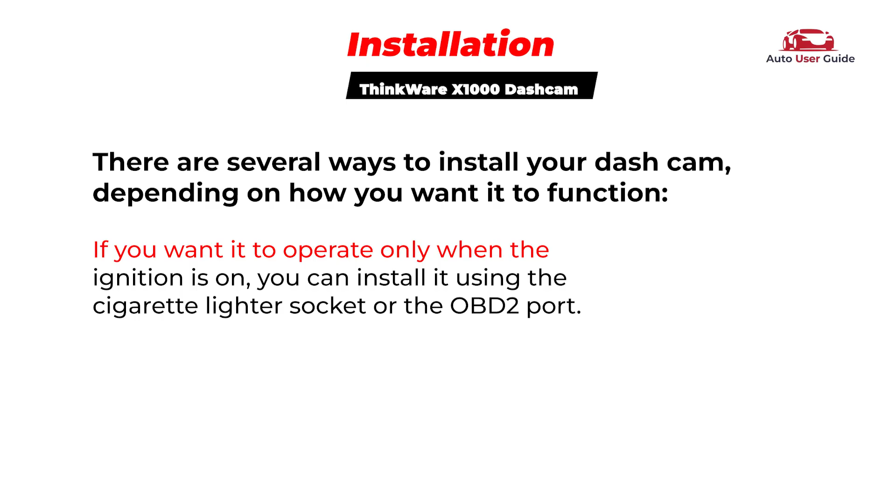Installation. There are several ways to install your dash cam, depending on how you want it to function. If you want it to operate only when the ignition is on, you can install it using the cigarette lighter socket or the OBD2 port. If you want it to stay powered 24/7, even when the car is off, a hardwire installation is required. In this video, we'll cover two installation methods: using the cigarette lighter socket and hardwiring it directly to your vehicle.

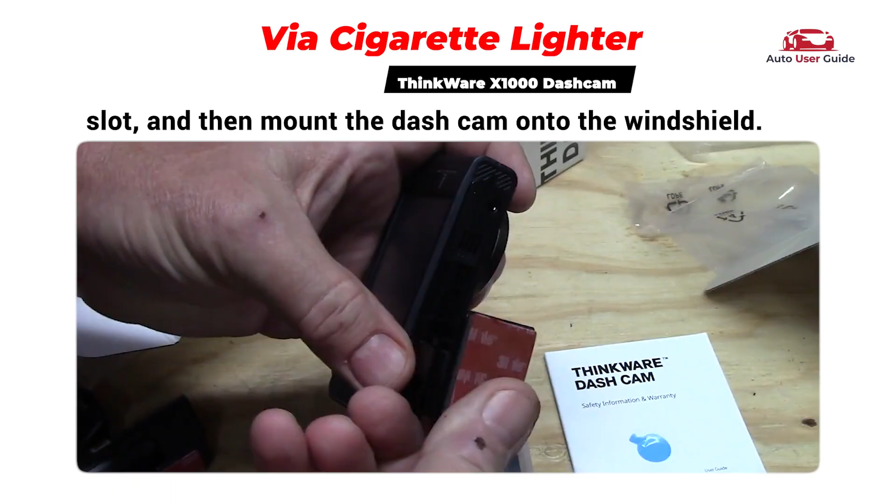Installation via cigarette lighter. Start by cleaning your windshield with a cloth, then choose a clear spot near the rearview mirror or in front of the passenger seat. Stick the electrostatic sticker at your chosen location. Next, insert the SD card into the SD card slot, and then mount the dash cam onto the windshield.

Connect the power cable to the dash cam and plug the other end into the cigarette lighter socket. Power it on to ensure it's working properly. Once confirmed, neatly tuck the cable into the vehicle's headliner and down along the A-pillar for a tidy setup.

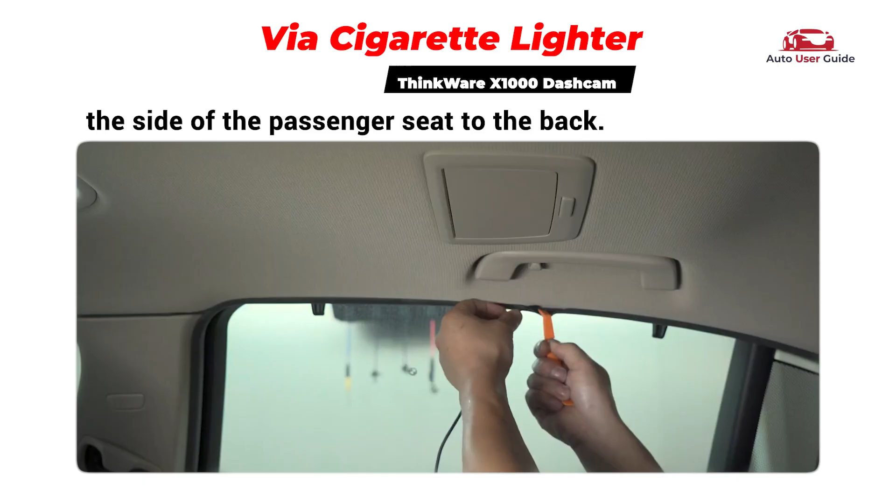Hide the charger wire along the front windshield and up the side of the passenger seat to the back. Connect the rear camera cable to the dash cam. Then repeat the process and mount the rear camera onto the rear windshield. Start the car and the dash cam will turn on by itself.

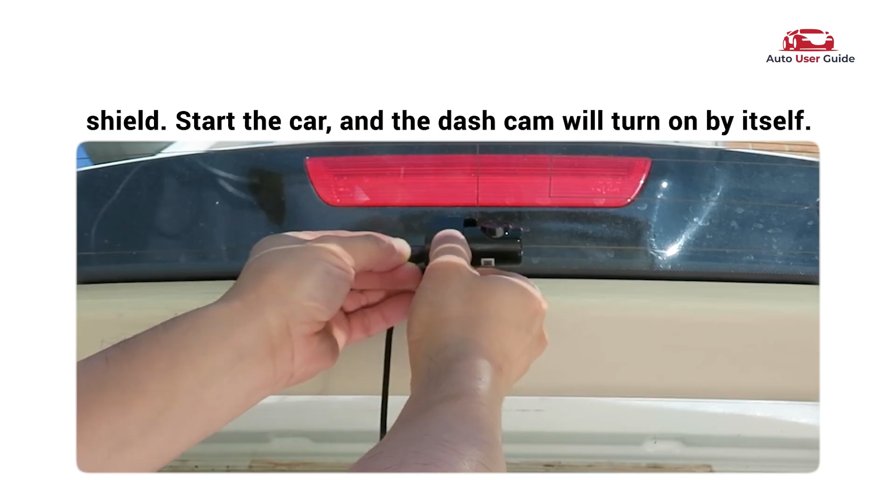Hardwiring the dash cam. Locate the cabin fuse box in your vehicle. Its exact position can be found in your owner's manual. For help, watch our fuse box guide video. Just tap the links below to view the video and access the manual.

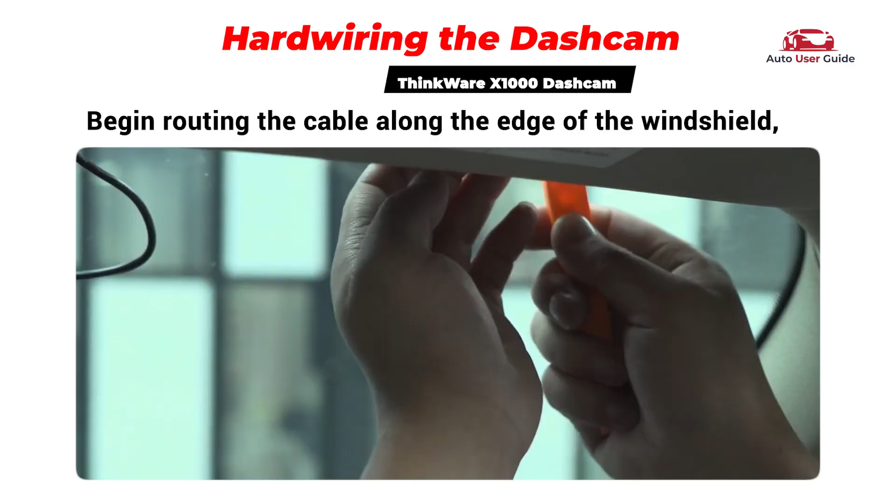Plug the hardwire kit into your dash cam. Begin routing the cable along the edge of the windshield, tucking it into the headliner to keep things neat and out of sight. Use a multimeter to check the fuses in your vehicle.

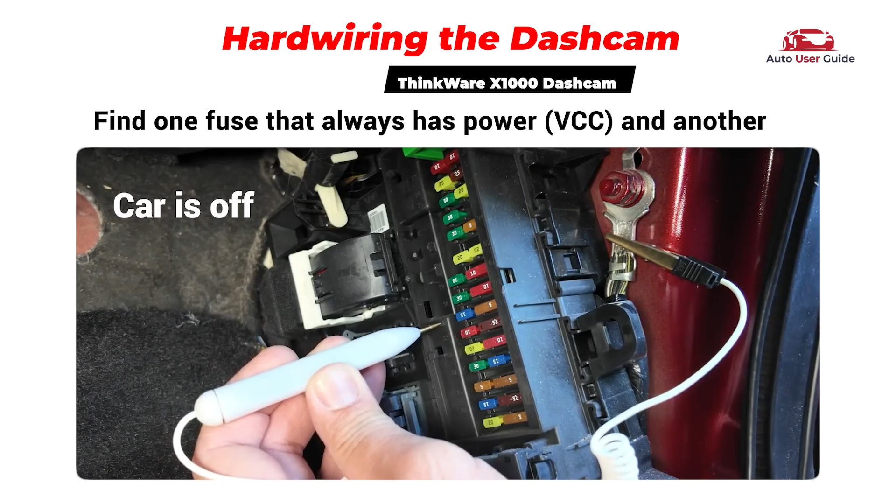Find one fuse that always has power, VCC, and another that only powers up when the car is running, ACC. The VCC fuse should show 12 volts at all times, while the ACC fuse should only show 12 volts when the engine is on.

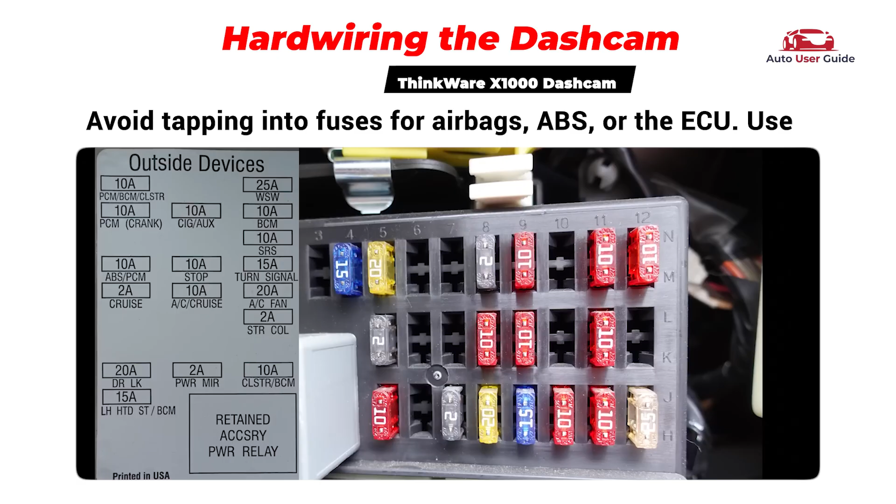Avoid tapping into fuses for airbags, ABS, or the ECU. Use empty slots or non-critical fuses like the radio, interior lights, or cigarette lighter instead.

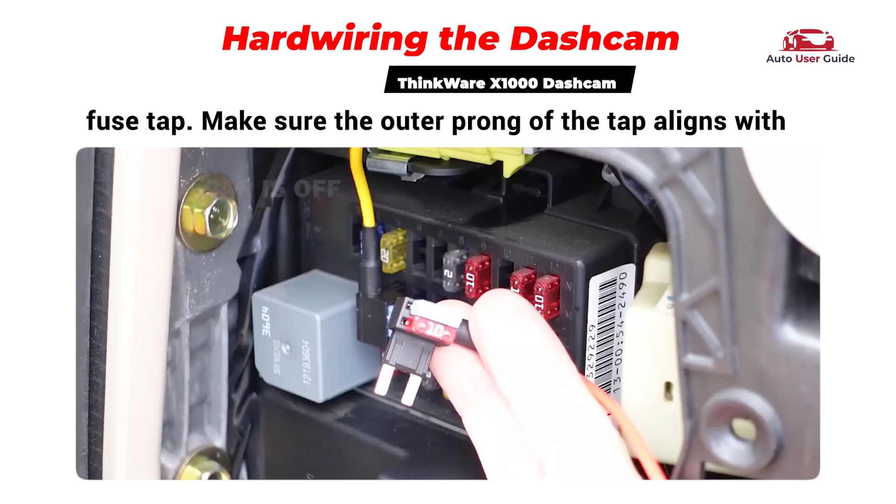Connect the red VCC wire to a constant power fuse using a fuse tap. Make sure the outer prong of the tap aligns with the fuse slot's powered side. Attach the yellow ACC wire to a switched fuse that gets power only when the ignition is on. Use a fuse tap for a secure and proper connection. Finally, ground the black wire to a clean, unpainted metal bolt on the car's chassis.

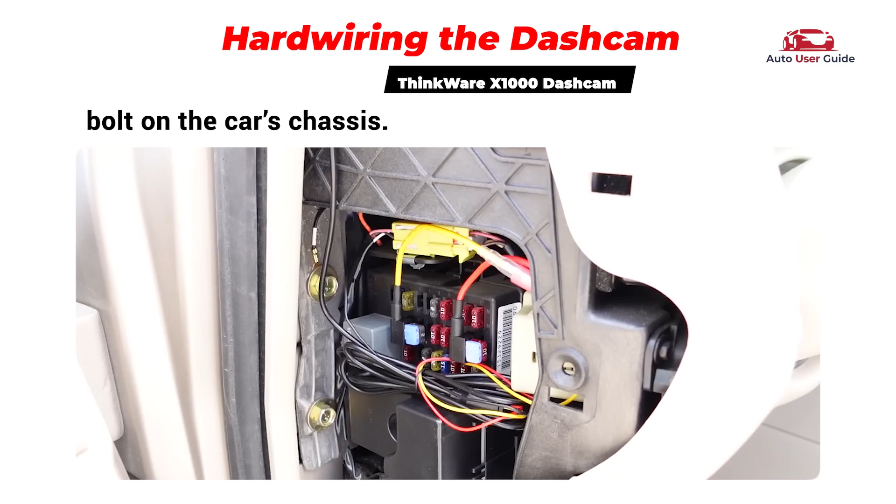App connection. Turn on your vehicle to power the dash cam, then open the settings menu on the touchscreen. Go to Connectivity, Wi-Fi, and switch it on. Connect your phone to the dash cam's Wi-Fi network using the default password, open the app, and you'll be able to view live footage, download clips, and manage settings directly from your phone.